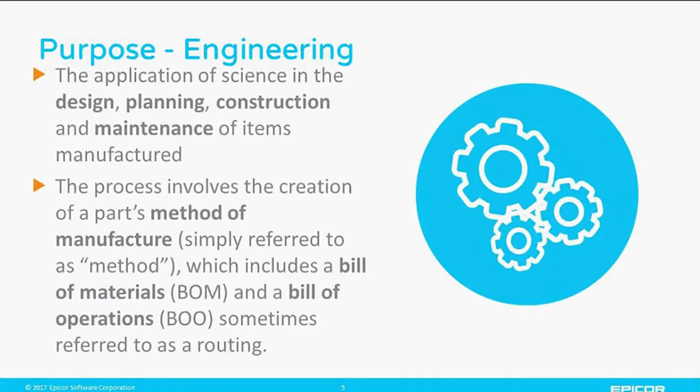Now, if you have products that are subject to configuration change, this is very important because it can track those particular changes for revision control and for compliance to changes in regulations. If you look at the Epicor concept of a method of manufacture, it interleaves the bill of operations and the bill of material into a single entity called the method of manufacture.

In this, we're looking for schedule inputs on the time to set up, the time for production, lead times, any secondary or related operations, and if you're using subcontract workers or subcontract operations as part of your process, how many days outside of your organization will that item be at the subcontractor for, and how is that going to impact the overall delivery capability that you have?

Of course, these all have cost implications. So you're looking at the cost of labor, any labor burden or overhead that you would have on top of that, the cost of materials going into the product being created, but also the material burdens. So things like carrying costs or wastage costs that you need to factor in on top of the standard material costs and the cost of any subcontract operations.

If it's cheaper, more cost effective, or you don't actually have the capacity, you sometimes need to send that work outside. But what you do need to do is maintain visibility, control, and reporting capability over anything that's subcontracted out to somebody else.

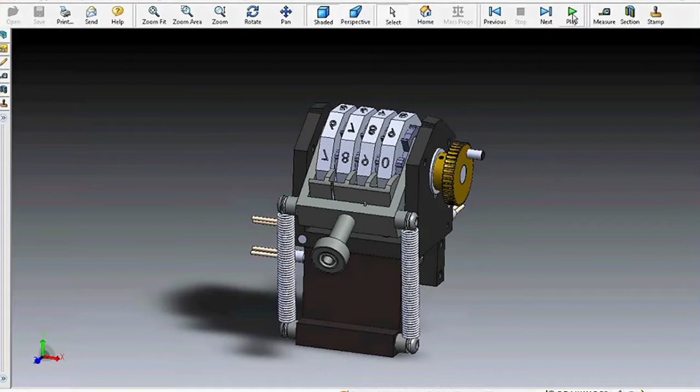If I'm in the engineering context, I might want to go and have a look at the CAD drawings for the design or the equipment that I'm manufacturing at the moment. And I might want to be able to pull that information straight up and view that, so I can get a feel for what it is that I'm about to manufacture. There's no work instruction that can be as illustrative as an animation.

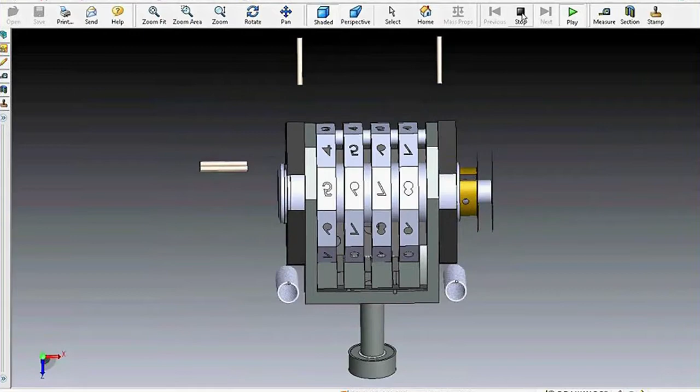So I can exit from there. Let's have a look at a particular job.

Why am I going to a customer tracker to talk about the shop floor? Well, one of the contexts of Epicor is that it's a fully integrated system. So in the orders, maybe the customer rang up and said, can you tell me where my order 123123 is, please?

Okay, well that's my order number. Let's go and have a look at the sales order that corresponds to that production. And I can see that I'm making one particular item on that. I'm actually making it on job 2131.

Now how am I actually making this? Right, well I have an assembly. That is the critical path assembly. That's why it's showing red.

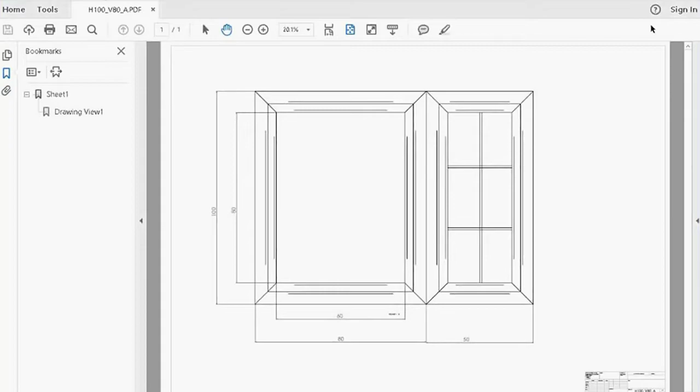Now in my MES environment and my active work, that's fine. Perhaps I'll close off my work queue. Perhaps I want to report some quantity - no, that's not the job I'm working on. I want to be working on this job.

Fine, I've made some so far. I need to make some more. And maybe I'll make another 20 of those. Production quantity reported.

Perhaps if I wanted to have a look at the job itself, I could look at, say, the job tracker, or job entry. If I wanted to go straight to the job tracker and have that up as part of what I have available to me, and type in 2131, I can do that as well. It shows me the breakdown of the method of manufacture, all the materials, all the sub-assemblies, all linked, and there's that attachment - the part revision document, which is the drawing.

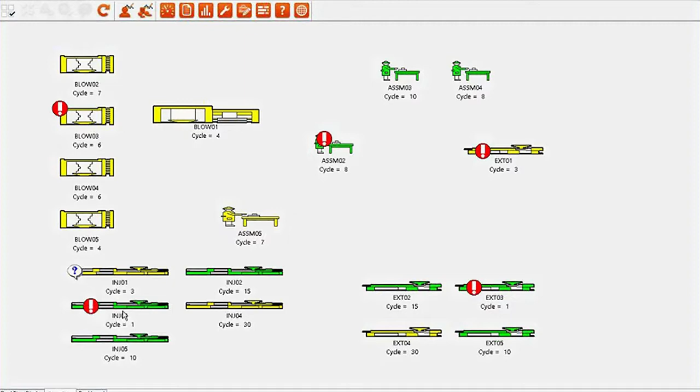We can also go through and look at the shop floor and see which machines are running, which are good - you can see the machines here are good at the moment, that one's good but needs some work. Then I can look at plant-wide efficiencies, overall equipment effectiveness, good production rates, which machines are currently down, which are up or operational, those sorts of things.

Within that, I can also look at various reporting, statistical process reporting, and everything through to the current draw on an assembly robot or an extrusion machine that's making product. That product may be part of an overall assembly.

So you have the options of creating a single level job with no sub-assemblies and trying to control that, or creating a job with multiple layers of assembly, because that's the way the product works best, it's the way it can be serviced best, it's the way it's engineered and designed. So there are options.

So that was just a quick demonstration of what we can do within the context of assemblies and job management. The areas we were looking at specifically within the overall Epicor ERP environment were production management - elements of job management, lean production, and manufacturing execution - but also product data management: bills of materials, routings, product costings, engineering change, revision control, that whole product life cycle.

We've seen customers experiencing a great deal of functionality, the idea of being able to have a paperless shop floor. I can now walk around the plant with my tablet and schedule machine runs with a few taps, rather than having it all down on paper and having to go back to an office all the time.

So, who is Epicor? Epicor is a company more than 40 years old, with in excess of 20,000 customers globally and nearly 4,000 employees. We operate in 150 countries, almost $1 billion in revenue. Our market is focused on small to medium enterprises, substantially manufacturing enterprises with complex products, complex processes, compliance requirements, all the way through to lower market, simpler products.